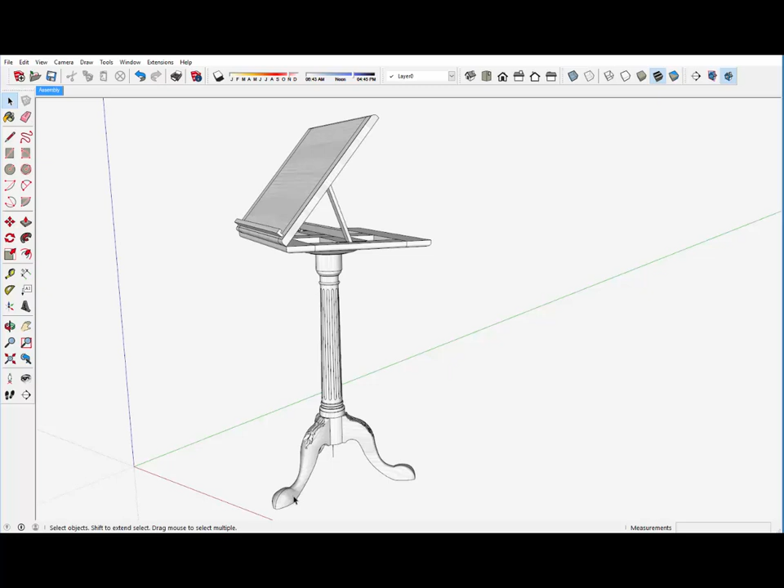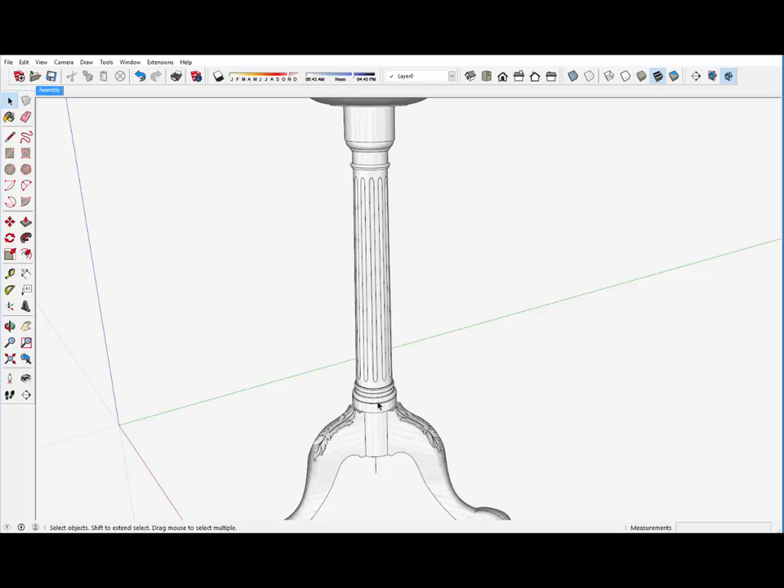In my last video, I showed this music stand, which was one of the featured pieces in Williamsburg's working wood in the 18th century. And I showed a little bit about making this tripod base with its dovetails. In this video, I'd like to show how I made these fluted shapes in the column.

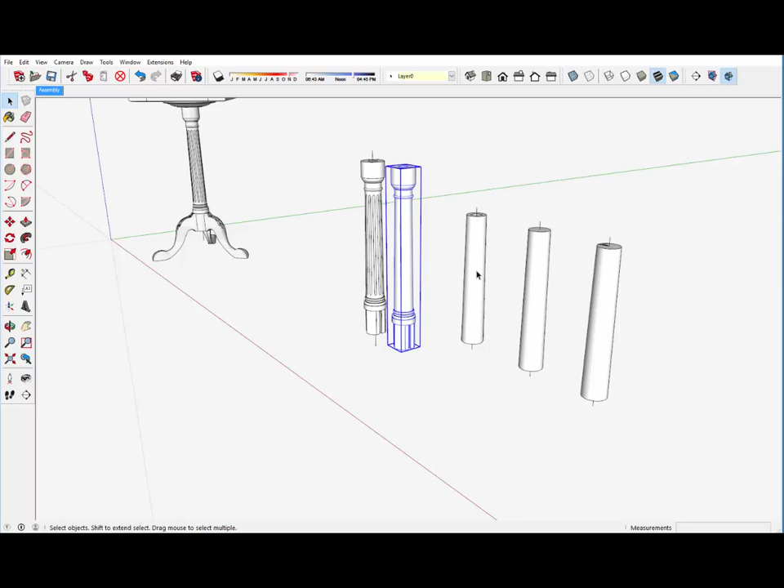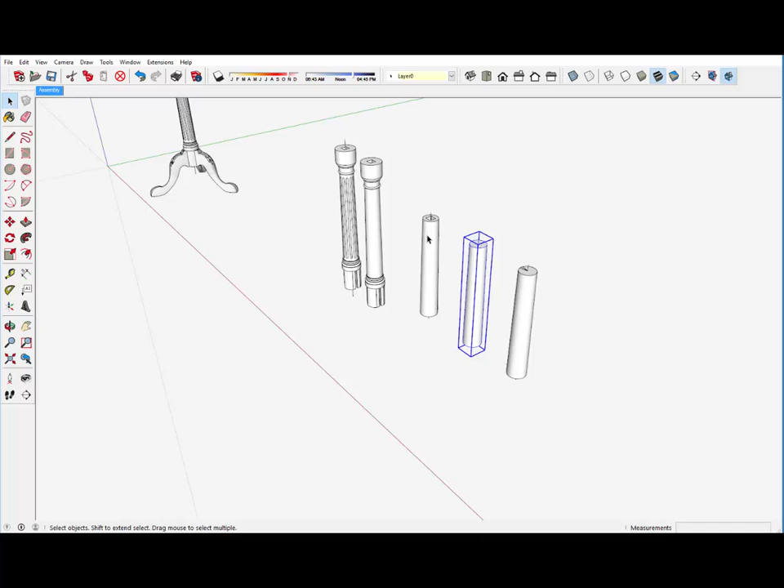And I've got a copy of the fluted column here, and then another copy without the flutes. And I'd like to show how I made those flutes in the turned and tapered column part. Now that fluted section is a separate component and is shown here. And then I made a copy of that and closed up that center square hole shaft for the adjustment of height.

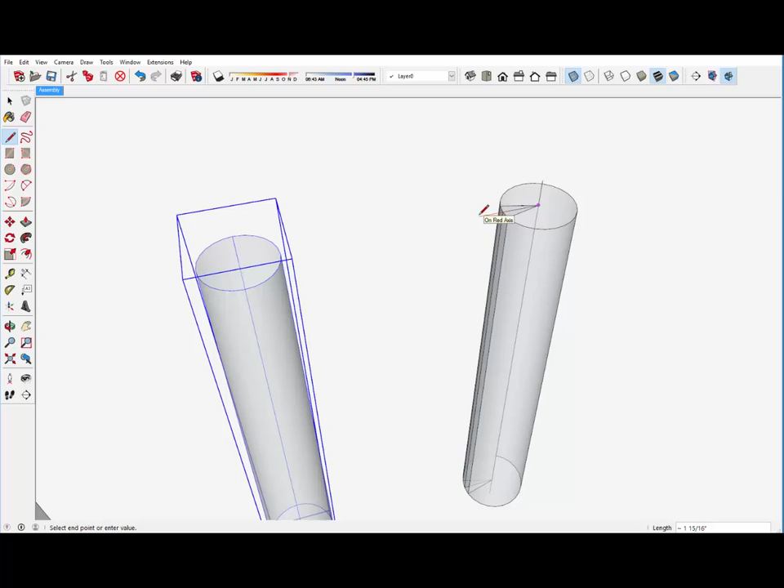And then over here I made another copy and I traced out one wedge of 12 sections. This is a circle that I made. I made this column with the default 12 sides, and then I drew these edges to the intersections of those sides and created this small wedge, 1/12 of the column. And that's all I want to work with at this time, just one flute and 1/12 of the complete column.

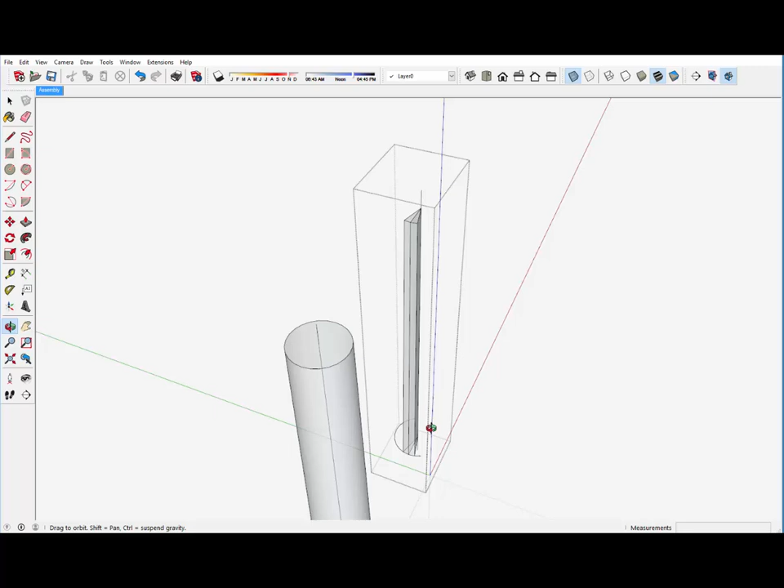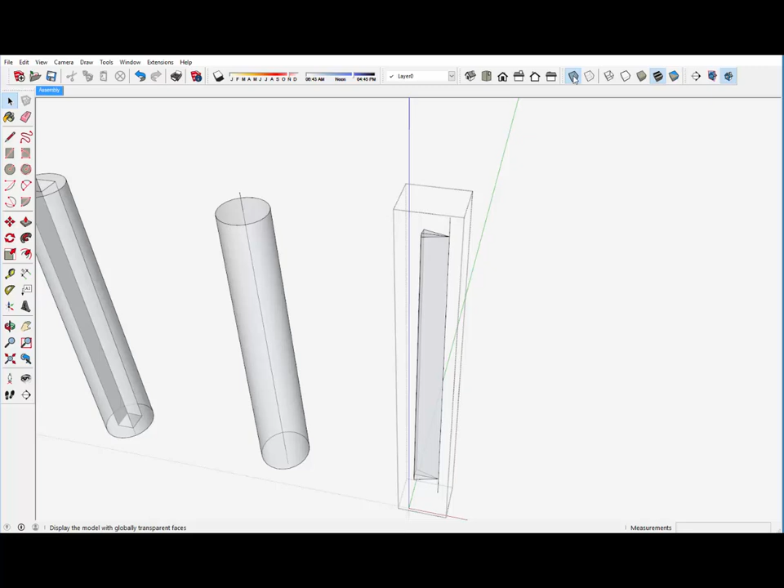So I'll delete out the waste, and I'm using right to left wherever possible to help in the deletion process. And a few little pieces here to get rid of. All right, so we've got now 1/12 of the pie here making the column. And I don't need this face, but I do need that middle face. And I'll reverse the faces on the center face. That center face is on the red axis, by the way, and that helps in some of the actions.

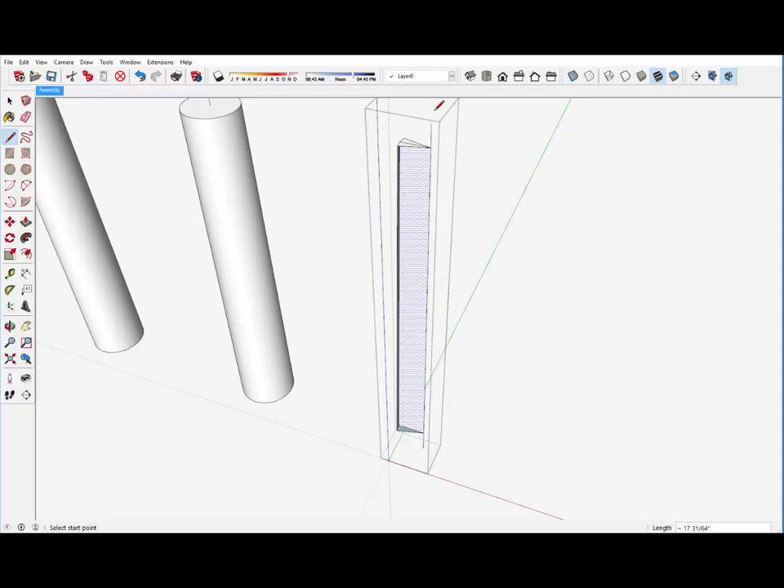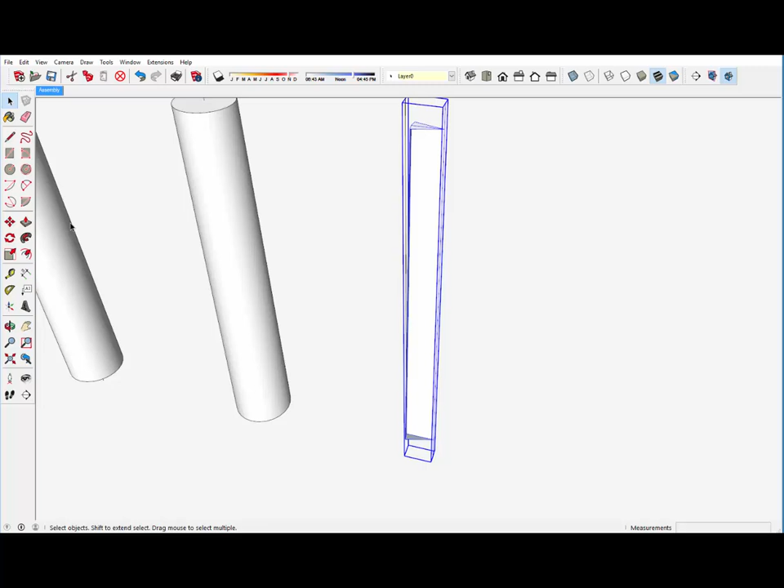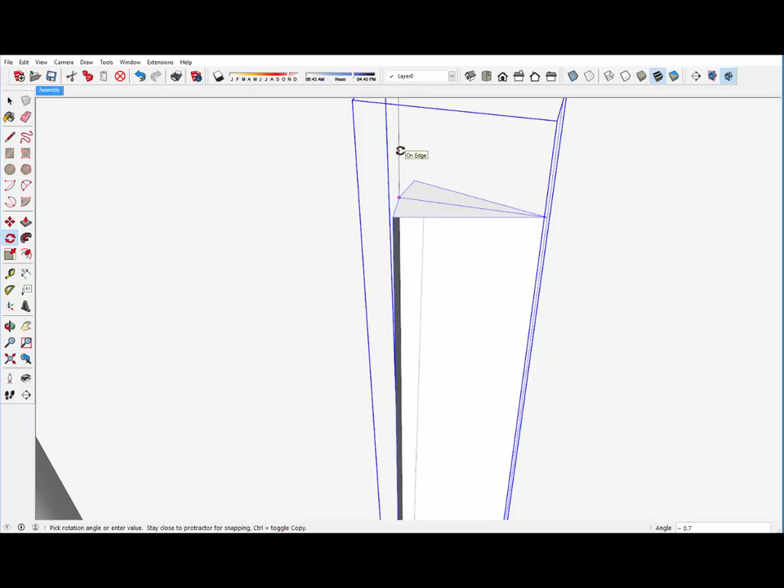The axis of the column, of course, is on the blue axis right now, but because of the tapering, this axis out here is not on the blue axis. So you can see that gap from the blue axis over to the edge of the wedge. So to help with the following procedure, I'm going to actually rotate this plate, this wedge, so that the outside edge is actually on the blue axis. You'll see later why that works. So now I rotated that over so that the outer edge is now on the blue axis. I can delete that line I drew on the blue axis.

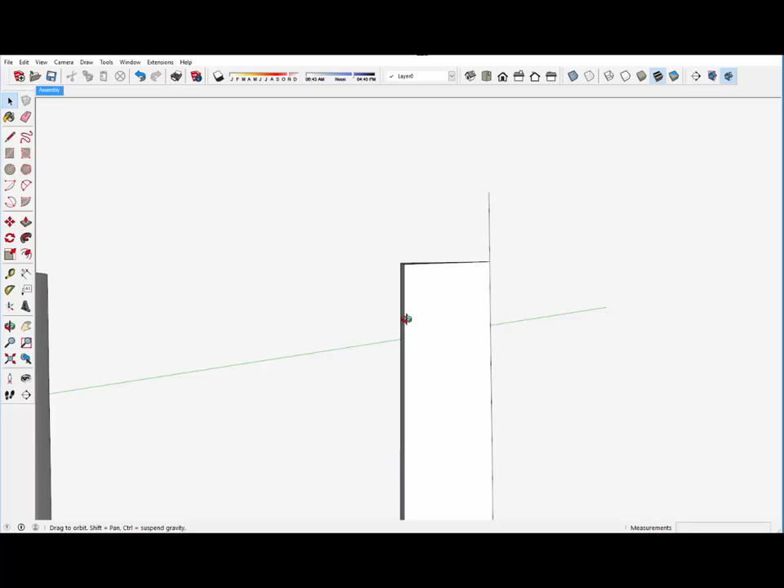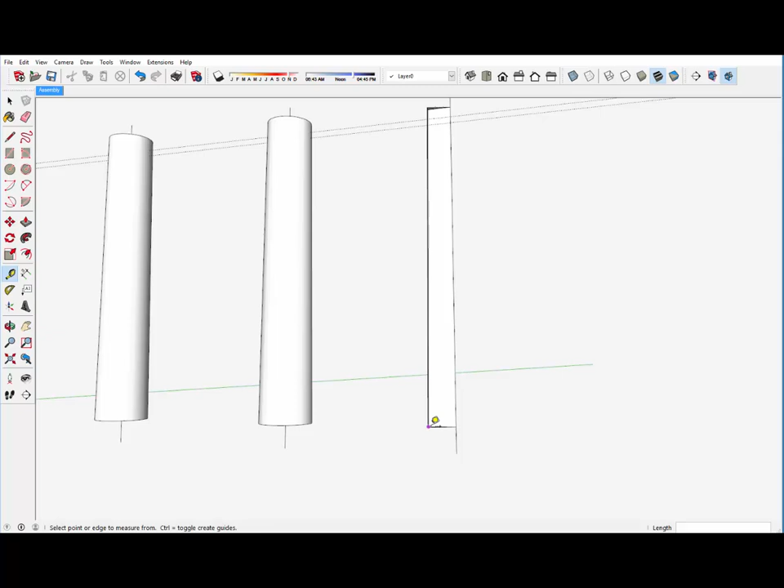And the next step then is to create the profile shape of the flute. I know the end of the flute is 1/2 inch from the top, and then I want to curve out from that starting end point. Again, down here it's 1/2 inch up, and then 5/16 is what I'm using to make another line there. And then the flute has a 5/32 radius. So I'll bring a guideline out 5/32,

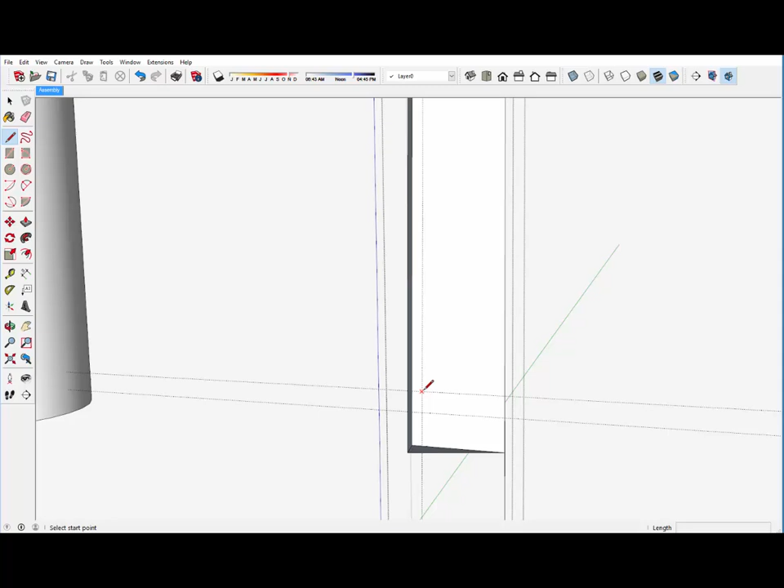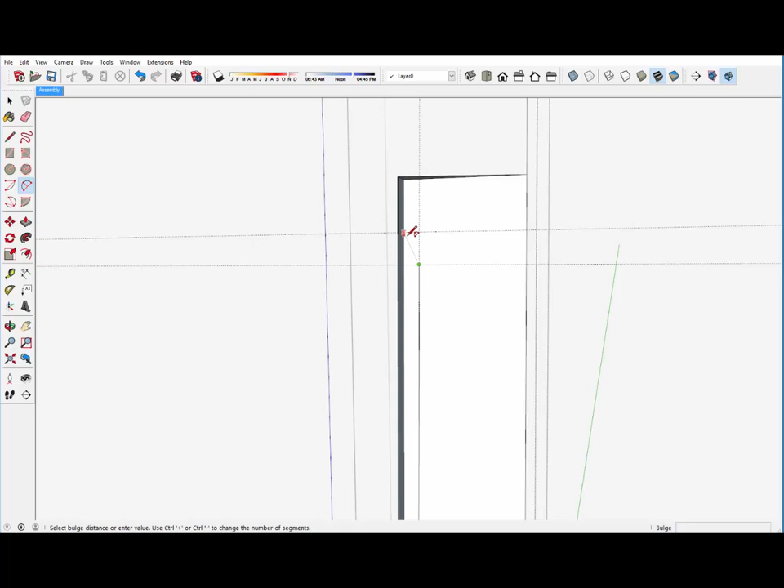edit the group, and then draw a straight line on this edge, and with the arc tool I'll complete the end of the shape, and I watch for that cyan tangent color. And here's down at the bottom the same tangent color at the bottom end of the flute. Now I've got a good profile.

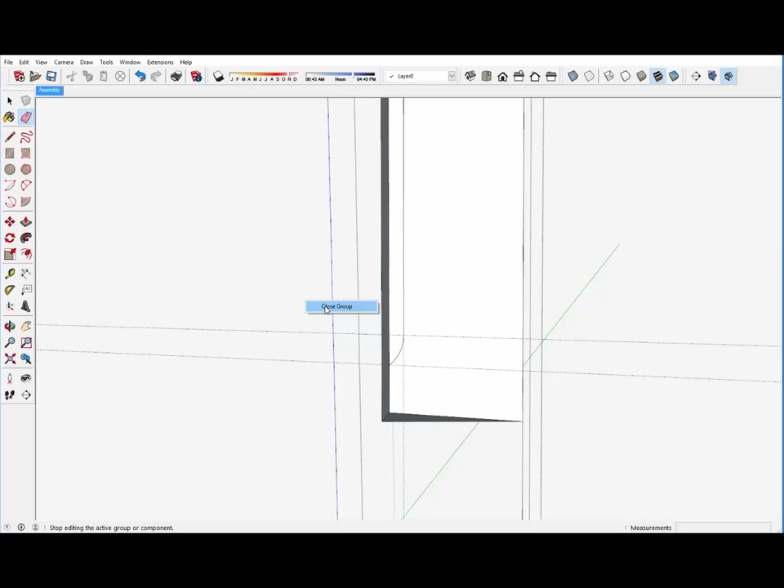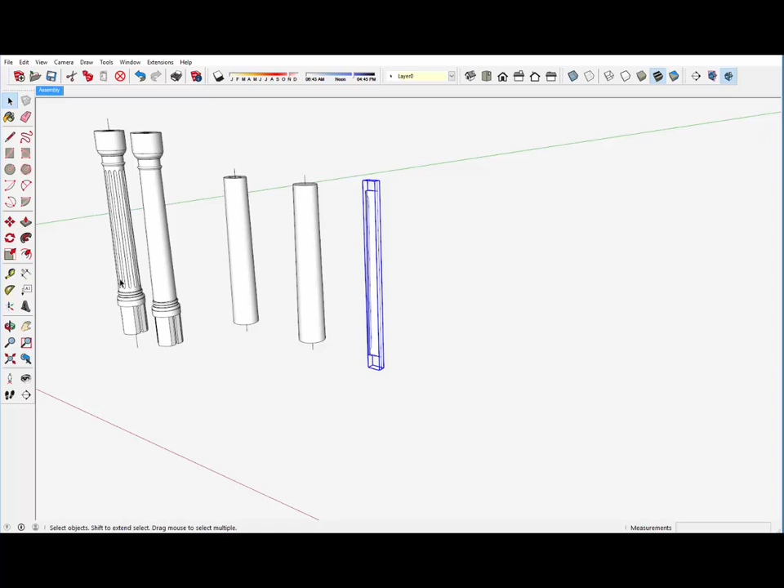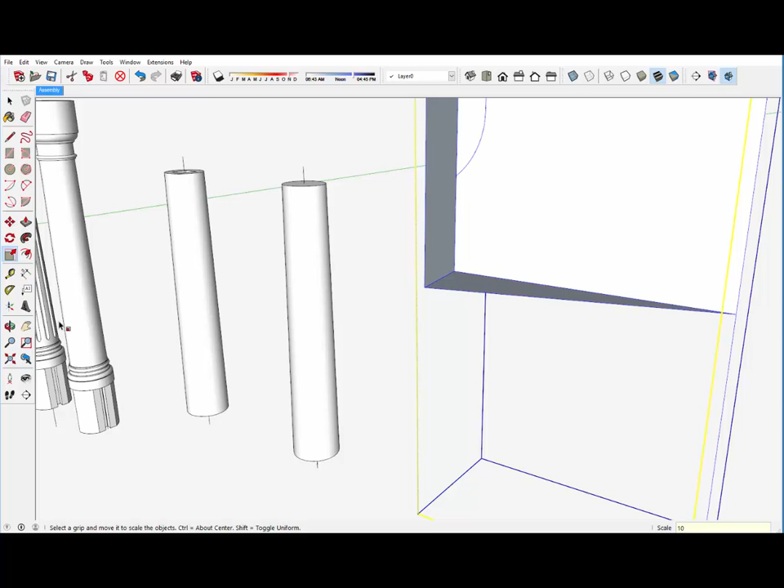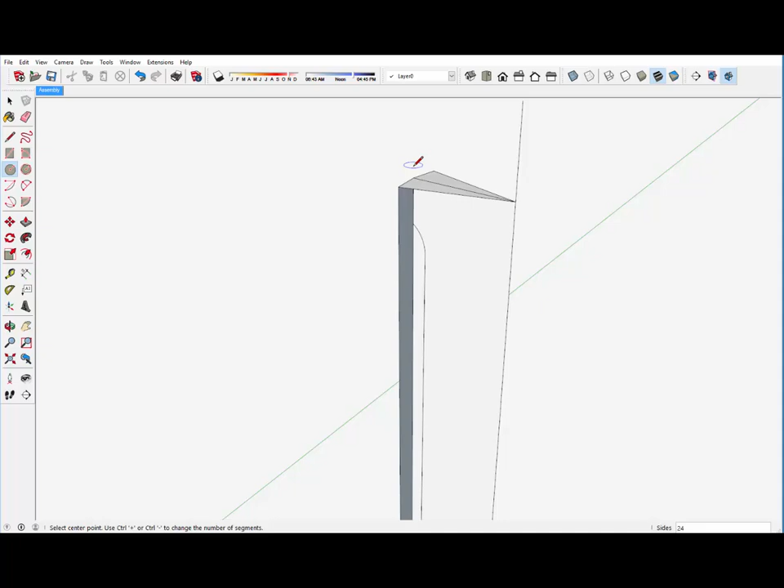I need to spin that profile with a follow me, and of course to spin that profile, I want to do this. I'm going to do an intersection later in the process. I'm going to scale this up by a factor of 10 to make sure I don't end up with some gaps in the faces. So here's our wedge shape with the profile at a scaled up size, and I need a path for the follow me.

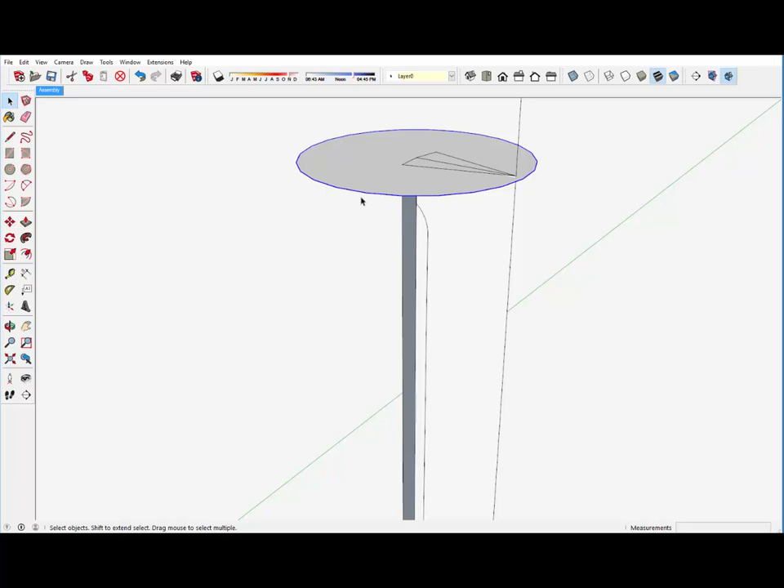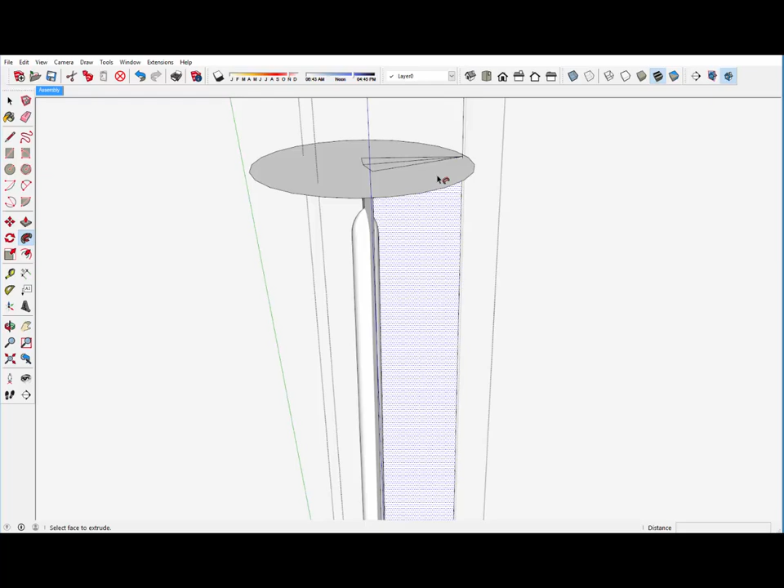Draw a circle. Interestingly, this circle is on the blue axis, which is not square with the top surface. Remember, we rotated that top surface over. And I'll select the circle and use the follow me tool. Open up the edit the group and click, and that spins the profile 360 degrees, and I've got the shape of the flute, and it looks pretty clean at both ends, so I don't see any gaps, so I think that factor of 10 helped that. The circle's not within the group, so I'll have to delete that later.

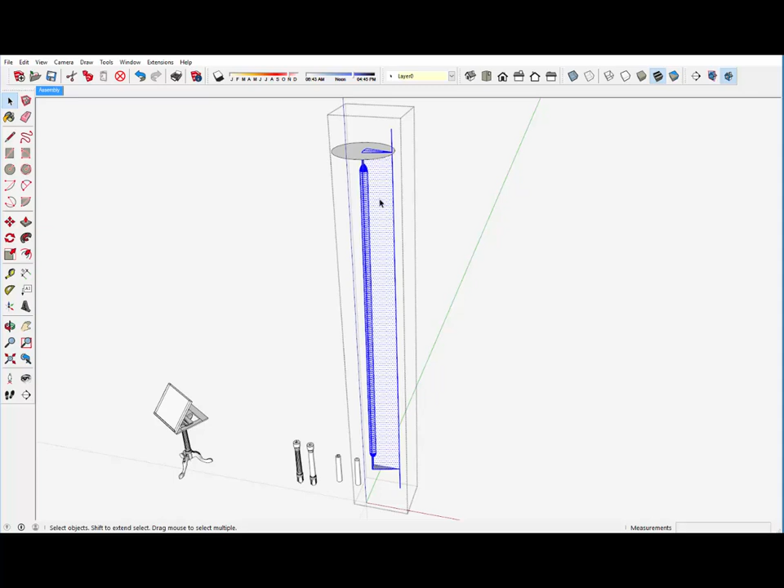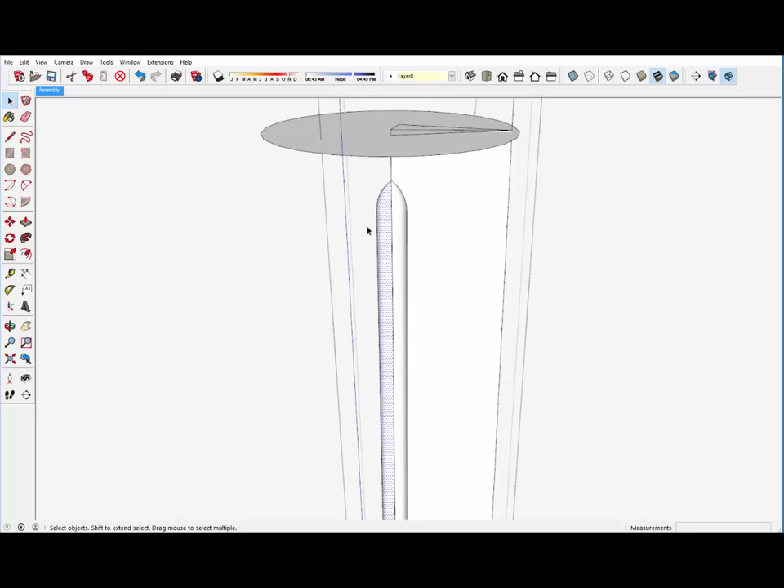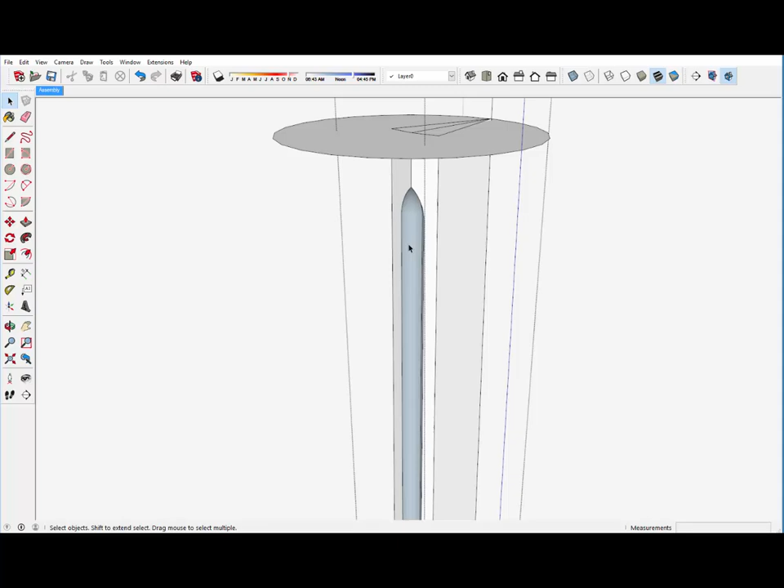I'll intersect the selection now, and so I've cut through the outer faces of that wedge with the flute shape. I can do a right to left on the outer part of that flute, and that takes away a lot of waste, and this face can go, or this edge can go away. Delete that edge, and now we've got a flute inside of the wedge. I can reverse those faces.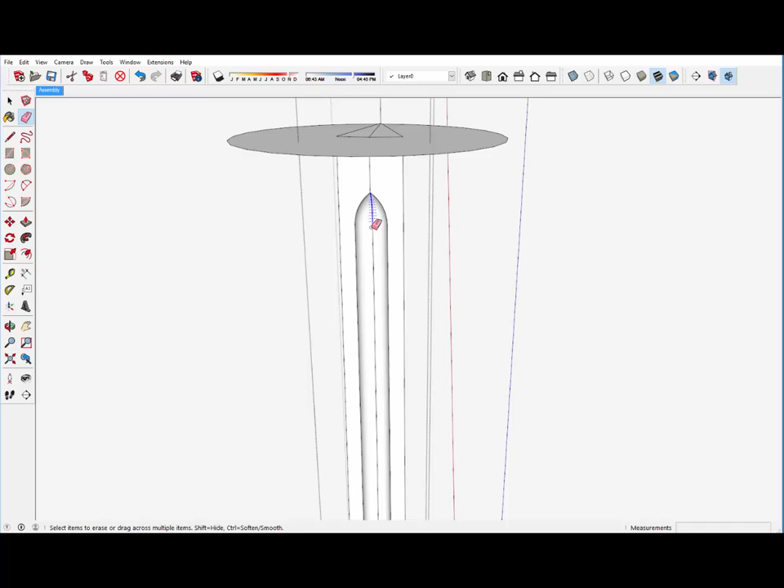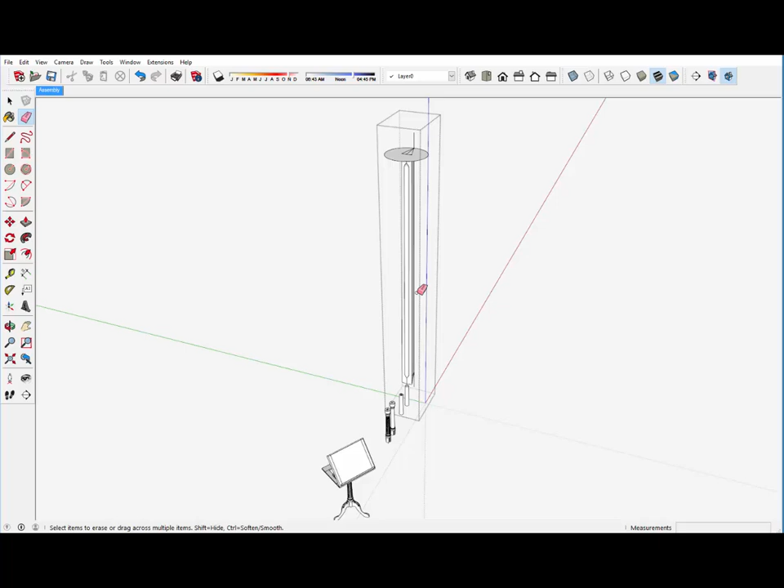I've got an edge here in the middle that is unnecessary, so I'll use the control key with the eraser, smooth out that edge, and again, a little piece of it down here. I've got one flute out of the 12 that are needed. And it looks pretty clean at this point. And I can delete the follow me circle path.

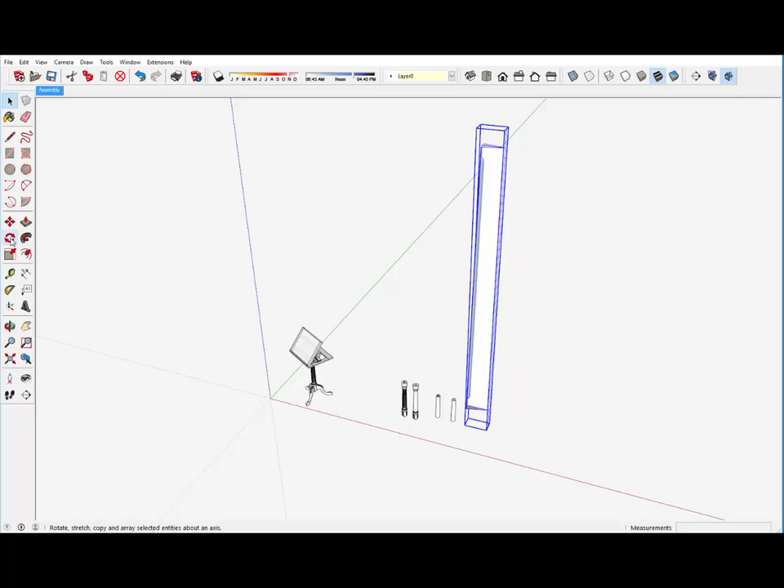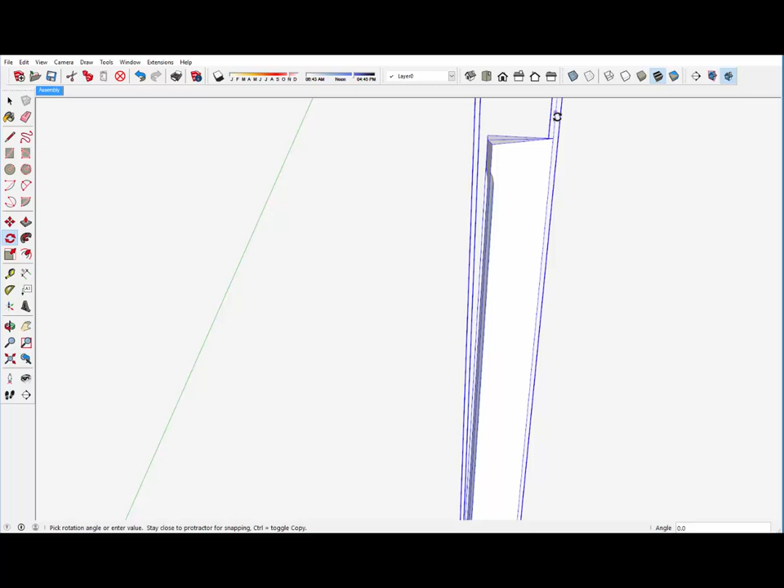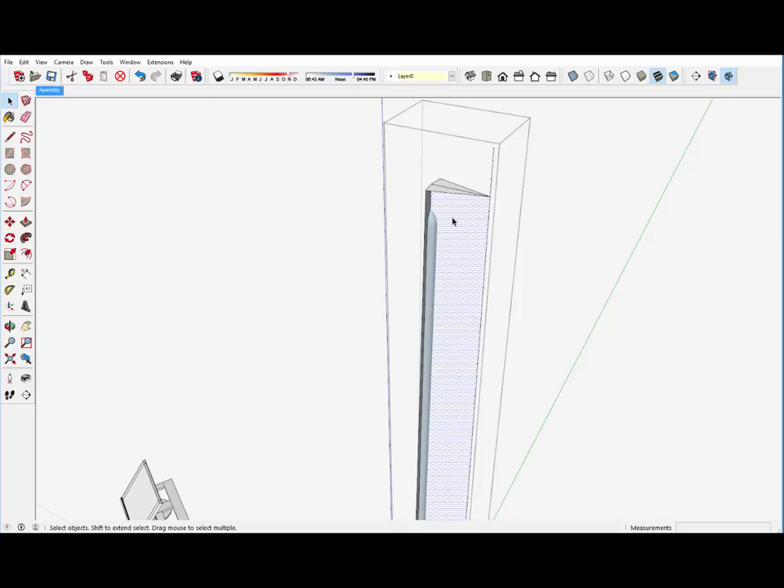I would like at this point to rotate the wedge back to its original tapered condition, and that means bringing this edge and rotating it over to the blue axis. And I wait for the sign that says on blue axis and click. Now we've got our taper back and the wedge centered on the center of the column. The next step now is, well, I don't need these faces anymore. So I'll erase them.

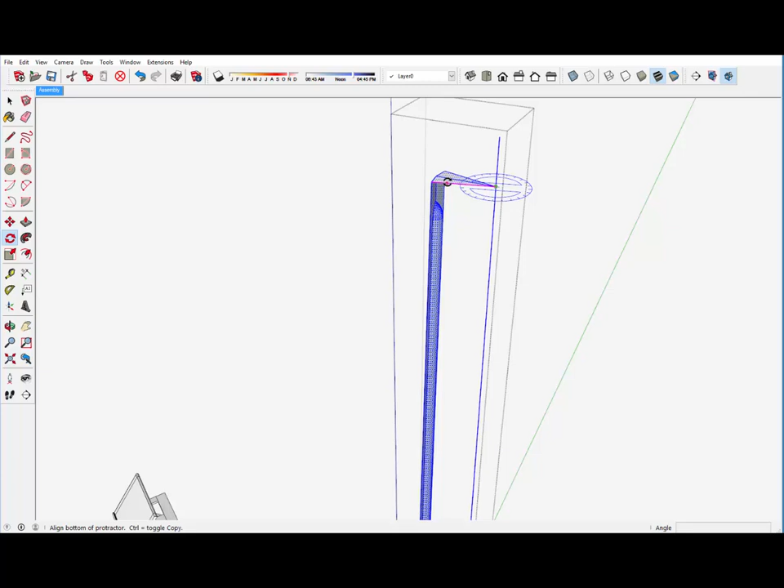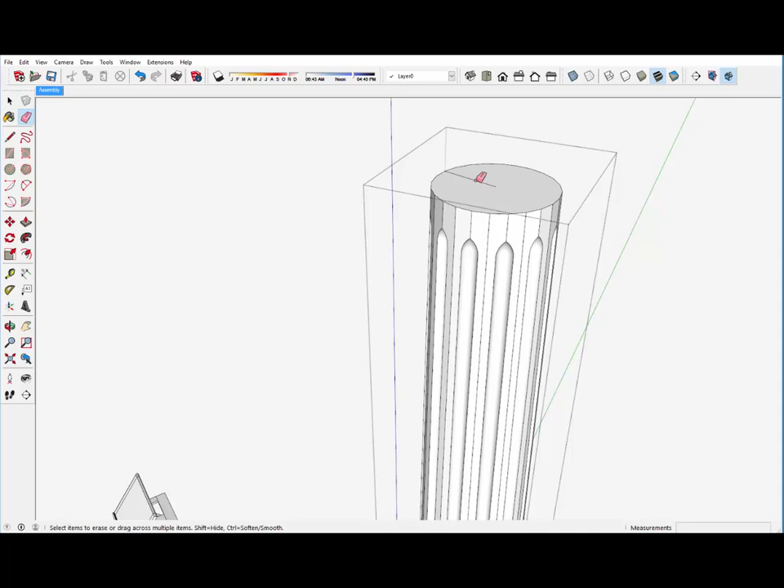And I need to multiply this by 12 to get all the flutes. I select the wedge, pick the rotate tool, and hit the control key for copy. And I copy over one wedge and then type in X11 to complete all the wedges. And now I can delete a lot of the extra lines and edges. Use the control key to smooth out these edges with the eraser.

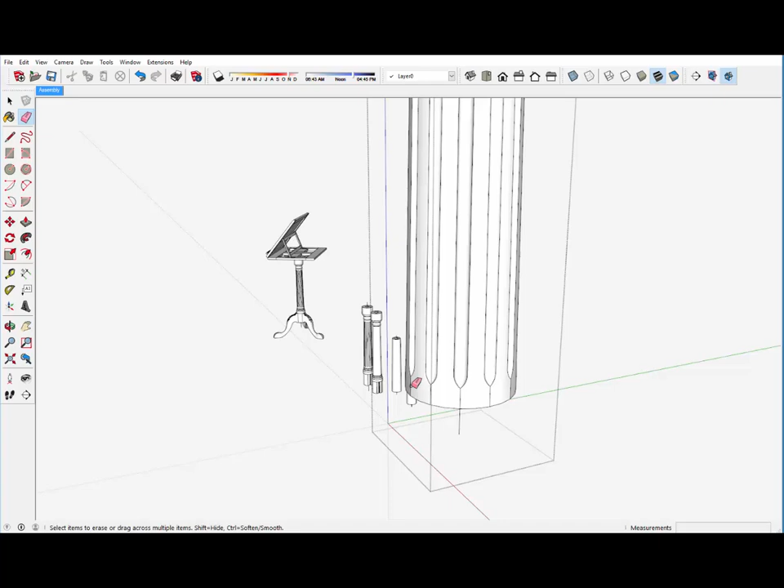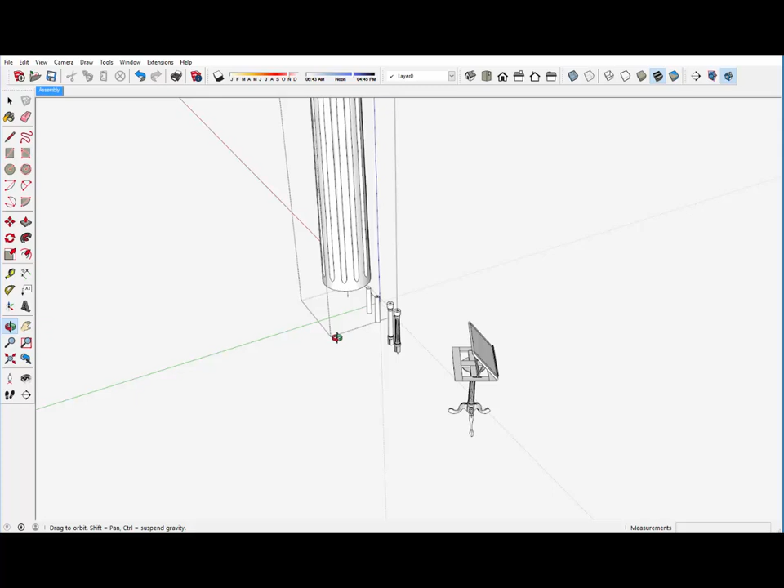And down at the bottom we've got some extra edges that need to be smoothed out. Not sure I've got all those, but I can catch any later if needed. Well, here's some more up here.

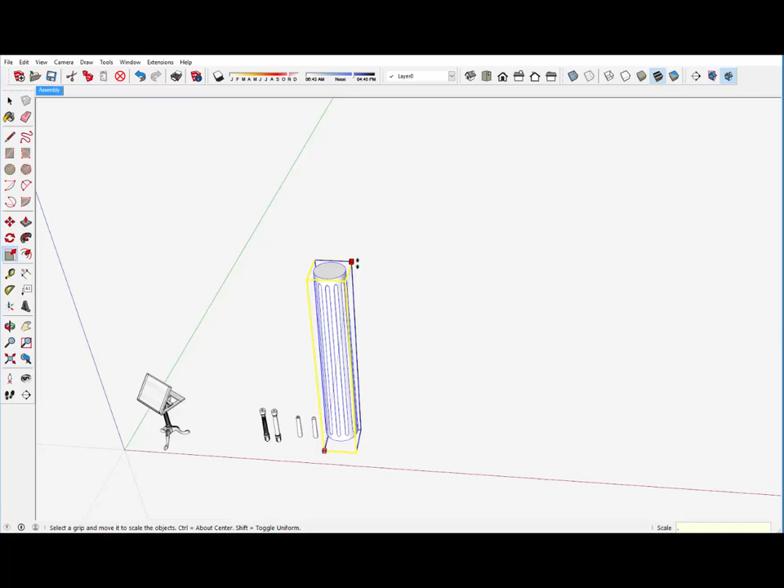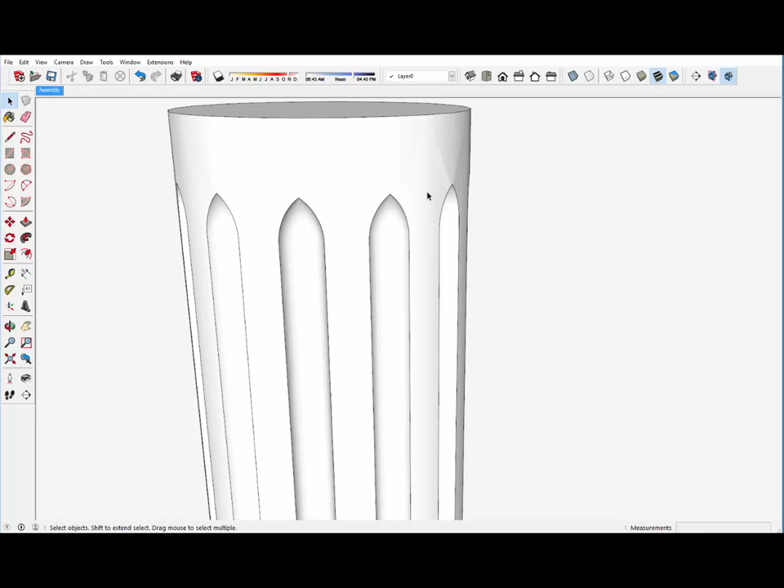We're still at times 10 scale, so at this point we can downscale and pick the scale tool and the corner to corner, and I type 0.1, and I've got back to the real size of the fluted column. Here's the result, and it looks pretty clean, and I can put that into the other column turnings and finish the job.